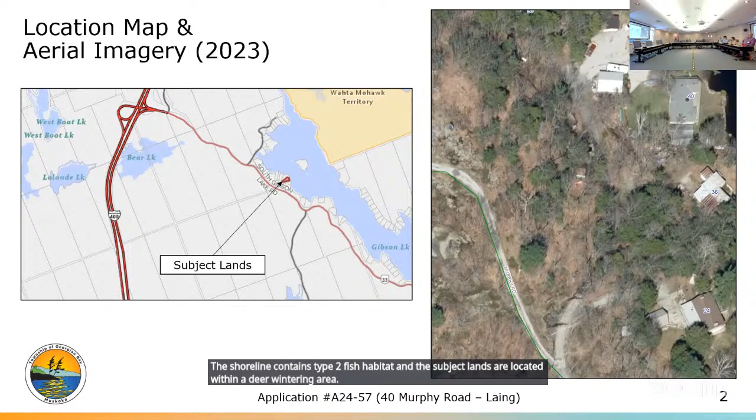Through the chair, the subject property has an area of 2,792 square meters or 0.69 acres and a frontage of 30.35 meters on Gibson Lake. A legal non-complying detached dwelling and shed occupy the lands. A shared driveway from Murphy Road runs through the middle of the property. The lands are designated waterfront within the district and township official plans, with high to very high archaeological potential and a moderate wildfire hazard rating. The shoreline contains type 2 fish habitat and the subject lands are located within a deer wintering area. The property is zoned shoreline residential type 1.

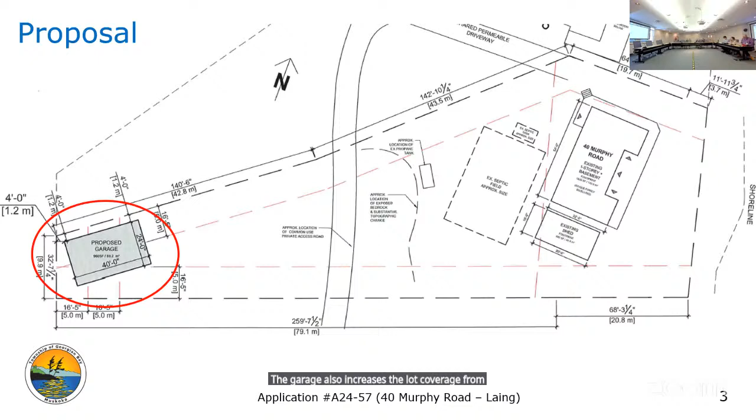The purpose and effect of the application is to seek relief from the zoning bylaw to facilitate the construction of a detached garage in the rear yard. The zoning bylaw states that accessory buildings located on lots zoned shoreline residential should not be located closer than 5 meters to a side lot line, whereas the applicant is proposing a minimum setback of 1.2 meters and 1.5 meters. Across all residential zones, an accessory building located in a rear yard shall not be located closer than 4 meters to the rear lot line, whereas the applicant is proposing a minimum setback of 1.2 meters. The garage also increases the lot coverage from 9.65%, or 259.6 square meters, to 12.49%, or 348.8 square meters, whereas a maximum lot coverage of 7%, or 195.4 square meters, is permitted.

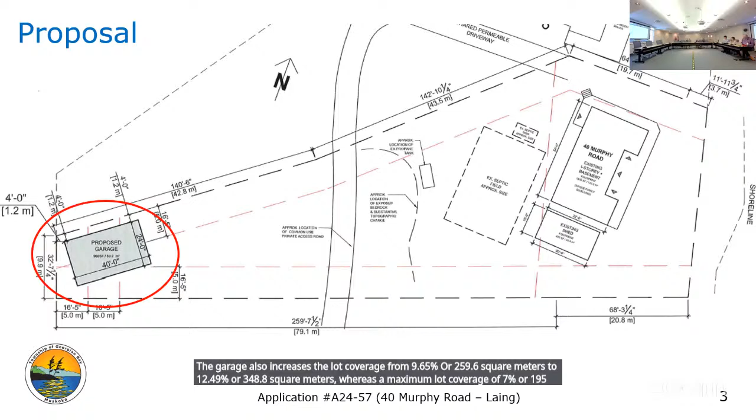The proposed garage will be 1 story with a height of 4.5 meters and a floor area of 89.2 square meters. To confirm, the garage complies with the maximum permitted floor area and height. The garage will be on relatively flat lands located at the top of a hill.

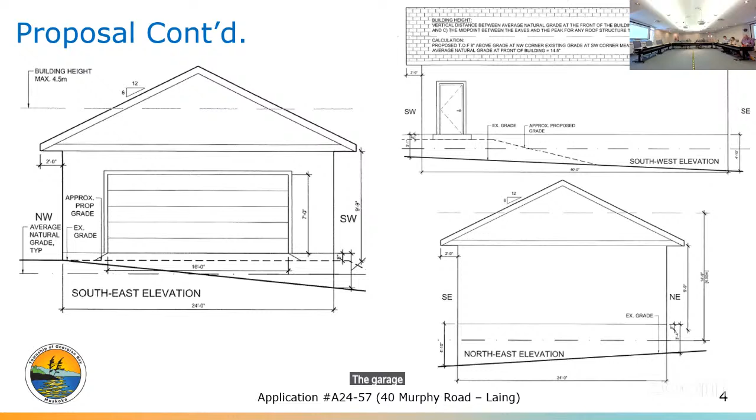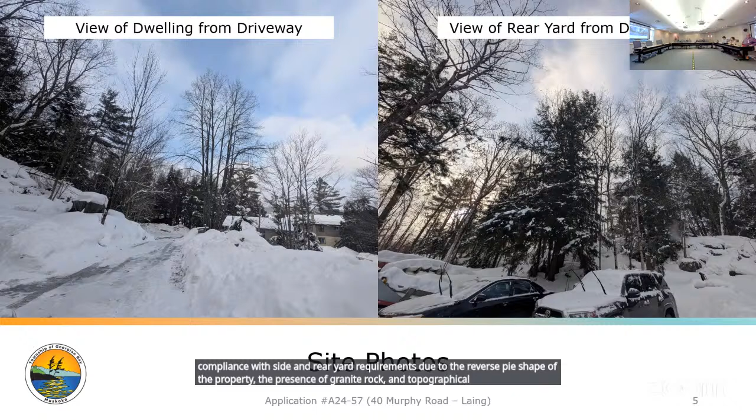The appearance of the property from Gibson Lake will not change with the addition of the detached garage, considering its location in the rear yard and the presence of dense mature vegetation. The applicant is unable to achieve compliance with side and rear yard requirements due to the reversed pie shape of the property, the presence of granite rock, and topographical constraints. Privacy will not be a concern for neighboring property owners, as the building is limited to 1 story with no windows, and there are no habitable buildings in the vicinity. The topography of the land indicates stormwater runoff will run down towards the center of the property.

The committee can either approve or deny any one of the requested variances, or defer the application to a later date if additional information is required. Planning staff have completed a detailed analysis outlined in the associated report and are recommending approval subject to conditions.

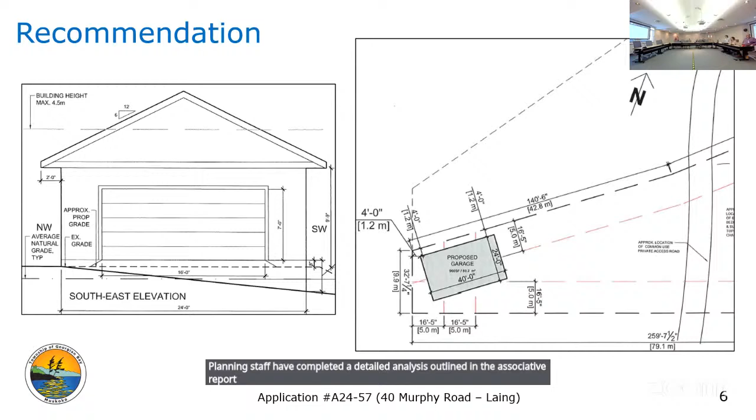Madam Secretary, has there been correspondence on this application? One letter was received from Kelly Nicholson, Chief Building Official, stating that there is no record of an existing system, and that there is no living accommodation or plumbing allowed in the garage.

If the applicant is present or online and wishes to address the committee, please step forward. Are you the applicant? Yes. In case there are some questions, we can put them to you and see where we go from there.

Is there any member of the public present who wishes to address this application? Seeing none present or online, I will close the public portion of the meeting and bring the application before the committee for any questions or comments. We will begin with Member Matthew.

Thank you, Mr. Chair. Shania, just curious on the lot coverage. It says that it's permitted to a maximum of 7%. Is that where it sits now, or is it over that? I'm having a tough time believing that a relatively small garage is pumping it up so much from lot coverage.

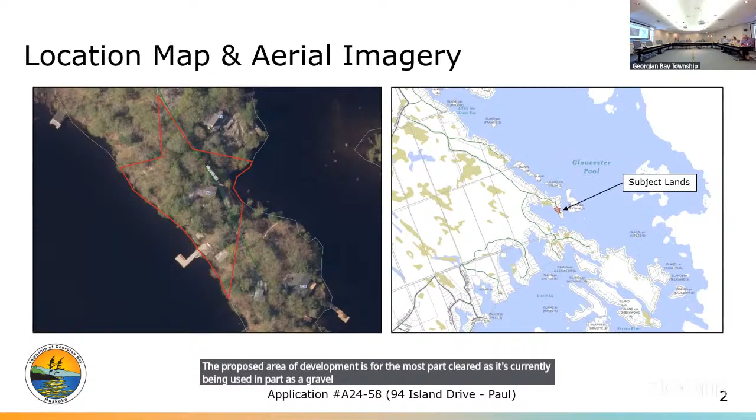In order to develop the property with the detached garage as proposed, a variance is required to address section 4.1.7 of the zoning bylaw. Section 4.1.7 speaks to the minimum yard requirements for accessory buildings. For shoreline residential or shoreline residential island zone lots, the minimum interior side yard requirement for any accessory building is 5 meters. Minimum interior yard setback provisions are intended to create adequate separation distance between neighboring residential properties and to provide efficient space for yard and building maintenance.

For non-shoreline residential properties, the minimum separation distance and interior side yard setback for accessory buildings is 2 meters. The minimum separation distance and interior side yard setback requirement increases to 5 meters for shoreline residential properties. The purpose of this increase is to reduce waterfront building and structure clustering, allowing for natural form to remain the predominant feature for shoreline areas.

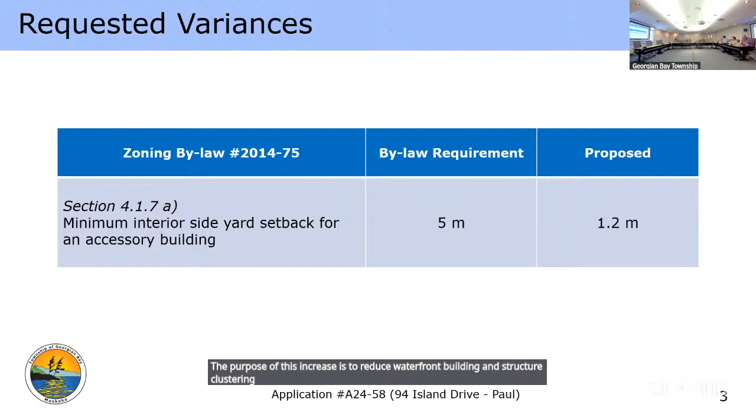The shape of the subject property is unique, presenting challenges to site a detached garage given the shared private road, the existing buildings and structures on the property, and the 2 shoreline frontages. The proposed location of the detached garage is the only portion of the property that would offer adequate setbacks to the private roadway, septic system, existing dwelling and accessory uses, and both shorelines.

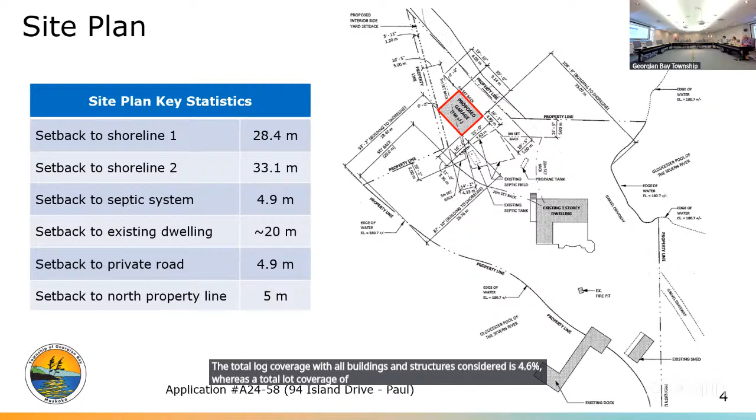The total lot coverage with all buildings and structures considered is 4.6%, whereas a total lot coverage of 8% is permitted. The proposed detached garage will be well within the maximum size requirements, being 70 square meters in ground floor area, whereas a maximum ground floor area of 112 square meters is permitted, and 3.6 meters in height, whereas a maximum height of 4.5 meters is permitted.

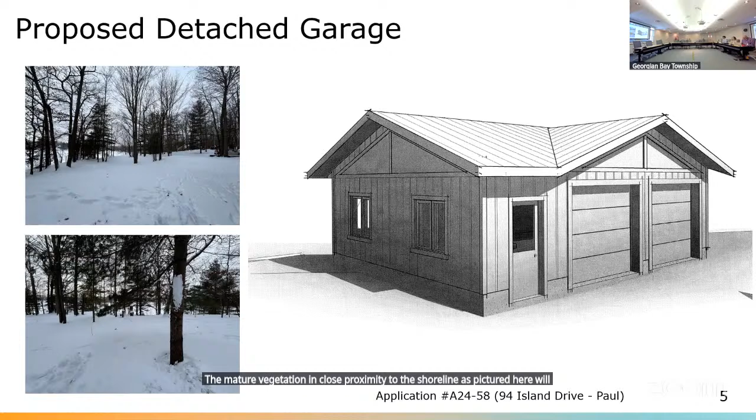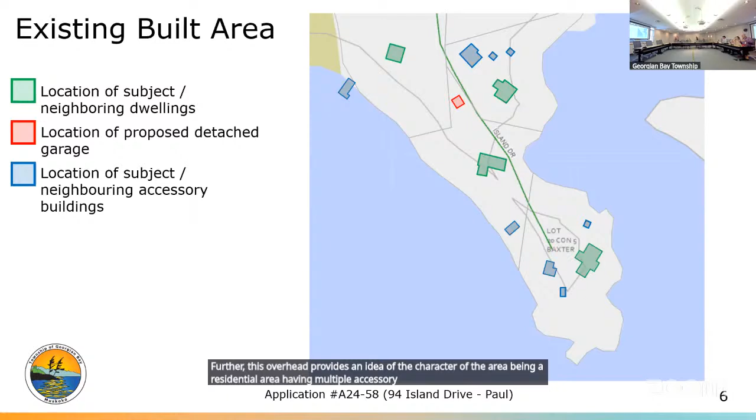The committee can either approve or deny the variance being requested. The committee may also defer the application to a later date if additional information is required to come to a decision. Planning staff have completed a detailed analysis of the variance of the zoning bylaw and are recommending approval subject to the conditions.

Thank you. Madam Secretary, has there been any correspondence on this application? One letter was received from Kelly Nicholson, chief building official, stating there could be possible issues with minimum required setbacks from the garage to septic depending on height of septic system above natural existing grade. Setback could be between 5 to 8 meters. And one letter of support was received from Lillian and Ralph Hutchinson.

Okay, thank you. Is the applicant or their agent present, and do they wish to address this application? Yes, my name is Greg Paul. Thank you. I think Andrew has actually expressed pretty much everything about this. There really is no other place for us to put the garage. Our intent, my wife's and mine, is to make this our permanent residence in the next few years. And we're tired of our cars getting dinged by falling branches. Okay, all right, if you don't mind just remaining there in case there are any questions that come your way.

Is there any member of the public that wishes to address this application? Okay, and do we have someone online that wishes to address the committee?

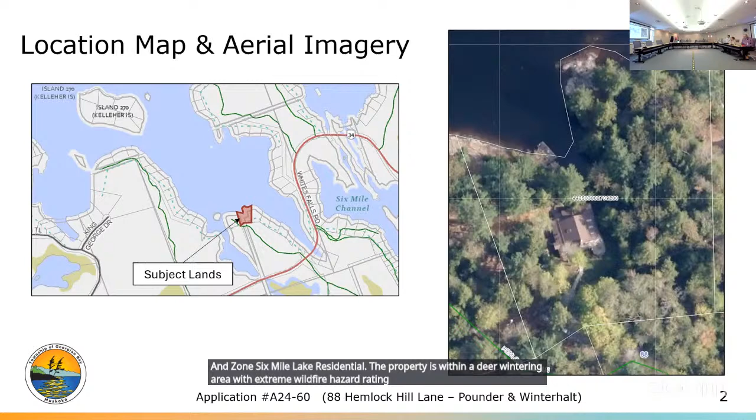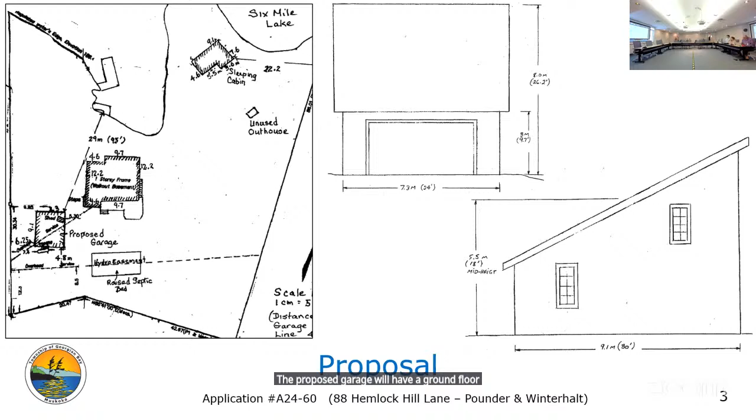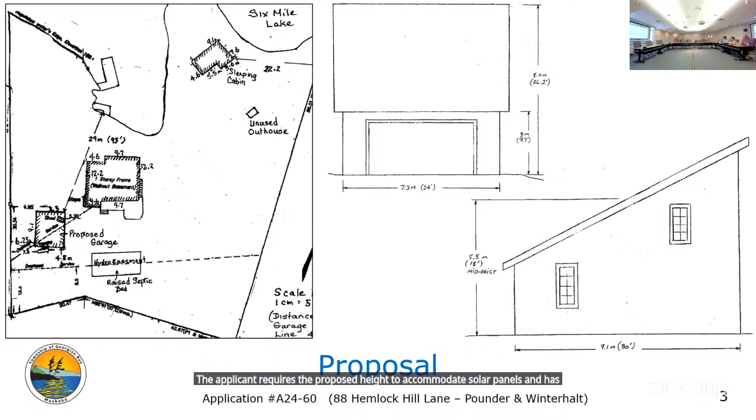The property is within a deer wintering area with extreme wildfire hazard rating, and the shoreline contains type 2 fish habitat. The purpose and effect of the application is to seek relief from the zoning bylaw to facilitate the construction of a detached garage with a height of 5.5 meters, whereas 4.5 meters is permitted. The proposed garage will have a ground floor area of 66.8 square meters and will be 1.5 stories. The garage will be located in the rear yard and requires the removal of a shed. The applicant requires the proposed height to accommodate solar panels and has informed staff that a height of 4.5 meters would require a roof slope that is too low to safely handle snow, putting the solar panels at risk of damage and reducing their efficiency during the winter season.

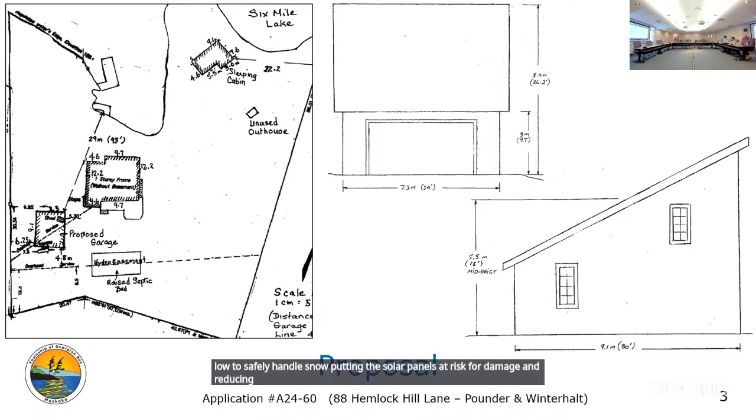Staff believe the proposed development will not have an impact on the natural heritage and aesthetic integrity of 6 Mile Lake, as there are no significant heritage features on or abutting the subject lands, and the garage will be located in the rear yard. In accordance with the principles of the community, the visual impact of development from the water is an important parameter in maintaining the character of the lake. As supported by photos provided by the applicant, staff believe the garage will not be visible from the water, and if so, will be screened by mature trees and the detached dwelling.

The intent of limiting the height of a detached garage is to assist with ensuring that the building remains accessory to the principal building or use on the lot in terms of size, and to reduce any potential negative visual impacts on both neighboring properties and the waterfront. The proposed garage height is less than that of the dwelling and has a smaller footprint. The detached garage will be screened from view by mature trees in the front, rear, and side yards, both on the subject and neighboring properties.

The applicant is also proposing increased side and rear yards of 6.25 meters and 14.4 meters, where a minimum side yard of 5 meters and a rear yard of 4 meters is required. Planning staff have completed a detailed analysis of the application as outlined in the associated report and are recommending approval subject to conditions.

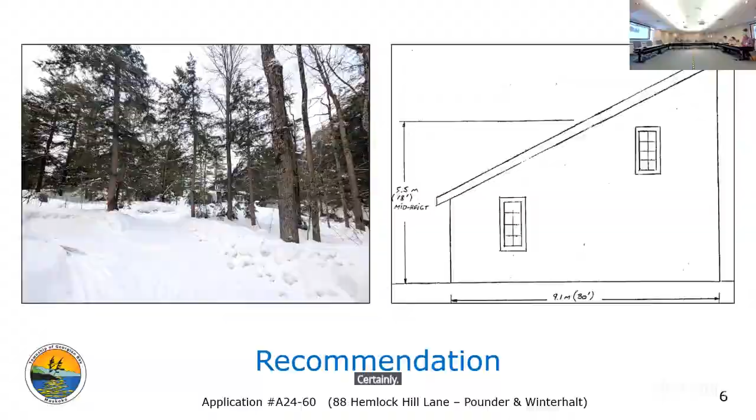Madam Secretary, has there been correspondence on this application? Certainly. One letter was received from Kelly Nicholson, Chief Building Official, stating that the garage cannot be beneath the service line to the house. Two letters of support were received from Liz Lawrence, Margot Parker, and Frank Longdice. Thank you.

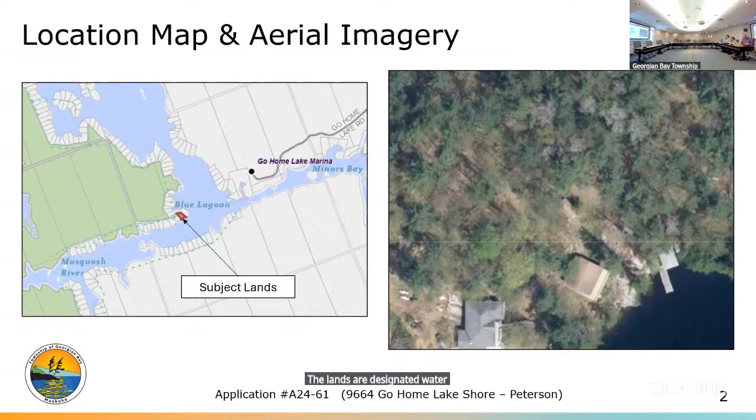In 2023, the Committee of Adjustment approved an addition onto the legal non-complying detached dwelling and an extension of the existing deck through minor variance application A23-28. The lands are designated waterfront within the district and township official plans and are zoned shoreline residential type 1.

The purpose and effect of the application is to seek relief from the zoning bylaw to facilitate the expansion of a legal non-complying deck and the construction of a new staircase. The proposed expansion is 12.82 square meters and will reduce the front yard from 6.78 meters to 6.46 meters.

For applications to expand a legal non-conforming use under subsection 45(2) of the Planning Act, the consideration is to be based upon both desirability for development of the property in question and the impact on the surrounding area. Only the proposed expansion may be evaluated for undue adverse impacts. The intent and purpose of the official plan is not a relevant consideration when applying these tests. In order to refuse the application, the undue adverse impacts of the proposed expansion must be demonstrated by objective evidence and must be sufficient to override the property owner's right to reasonable flexibility, evolution, and expansion.

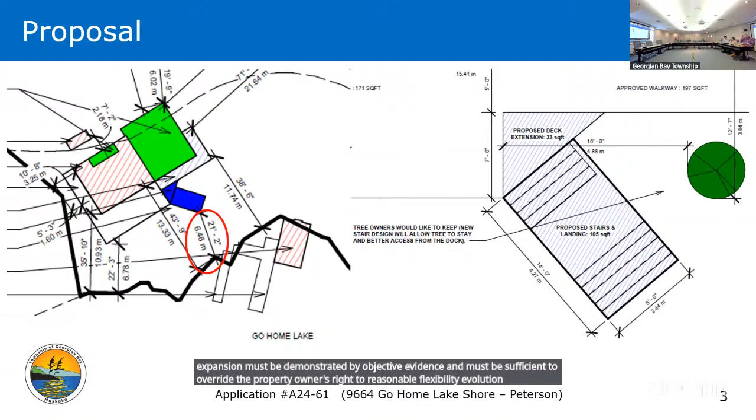A mature pine tree in the front yard is being retained as opposed to removed, which would otherwise be required to accommodate the longer than anticipated staircase from the deck that would maintain the legal non-compliant setback. To clarify, the previously approved staircase was located at the side of the deck running parallel to the shoreline.

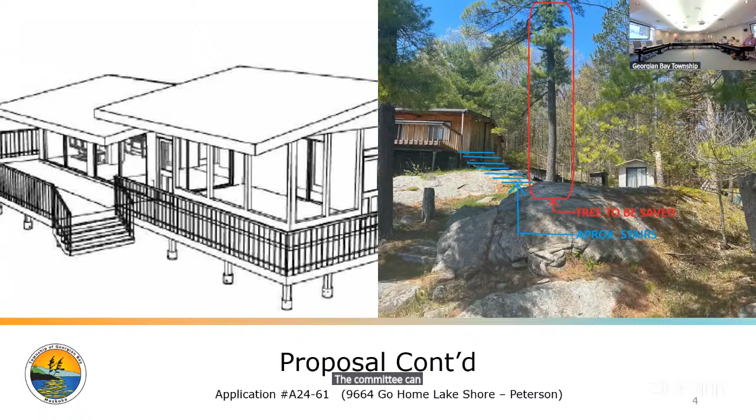The committee can defer the application to a later date if additional information is required to come to a decision. However, planning staff have completed an analysis of the application and are recommending approval subject to conditions.

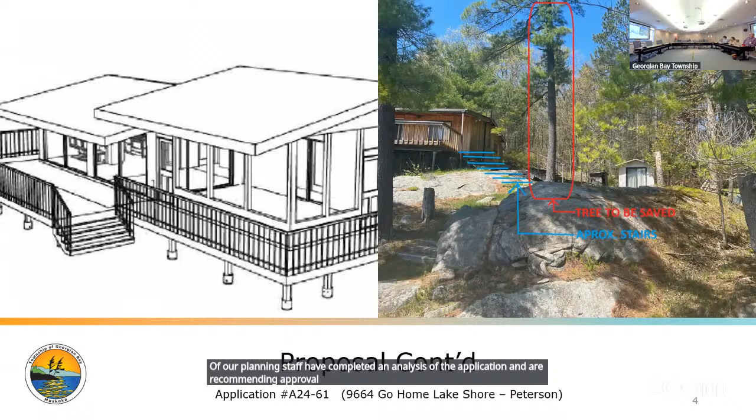Thank you, Ms. Swanford. Madam Secretary, has there been any correspondence in this application? Yes, one letter was received from Kelly Nicholson, Chief Building Official, stating she has no concerns.

Is the applicant present? If so, please step forward and identify yourself. Good morning, my name is Victoria Hoffman. I'm here on behalf of Flow Drawings at 3 Violet Drive, Port Severn. This one is pretty straightforward. As Shania said, we were here in August of 2023 for a cottage addition that was approved.

We expected the grade to come down a little bit, and once the floor started getting framed, they realized it wasn't going to work the way that they wanted to, in terms of the stairs. They're very attached to that tree in the front, and also, in one of those photos, there's a natural path that goes up between the rock ledges, and they just want to keep with that as opposed to trying to move the rocks around. Here to answer any questions.

Is there any member of the public that wishes to address the committee on this application? Seeing none, I'll close the public portion of the meeting and bring the application before the committee for any questions or comments. Seeing none, I will read the resolution.

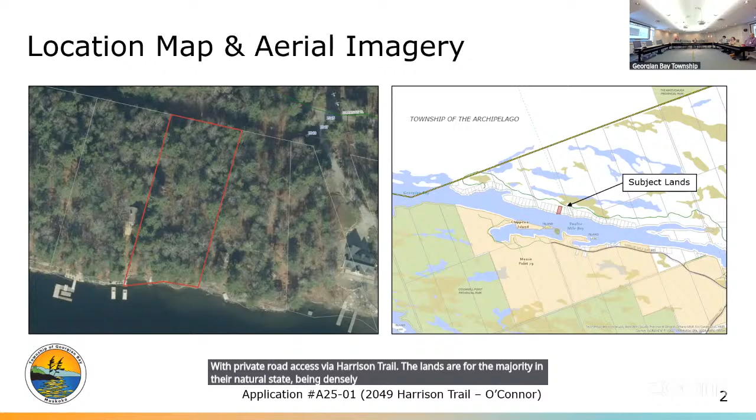Thank you, and through the chair. The subject property has an area of 1.15 acres with a frontage of 45.5 meters onto 12 Mile Bay, with private road access via Harrison Trail. The lands are for the majority in their natural state, being densely vegetated. The property currently contains a dwelling, a freestanding walkway, and a shore deck.

In accordance with section 4.11E3, the height of the legally existing dwelling shall be permitted to increase by 1.5 meters to a maximum of 6 meters based on the height of the legally existing dwelling on the day the bylaw was passed. However, the proposed increase is only 0.9 meters. The existing dwelling height is 6.27 meters, meaning the proposed height will exceed the 6 meter maximum, being a total of 7.17 meters.

The expansion is compliant with all other requirements of the zoning bylaw, being well within the additional legal non-complying dwelling expansion limits stated in section 4.11E3. The existing dwelling would be permitted to expand in gross floor area to 90.2 square meters. However, the development seeks to increase the size of the dwelling from the current 53.05 square meters to 66.89 square meters. The dwelling width is not proposed to increase at all.

The proposal will also see the existing open deck at the front of the dwelling wrapping around the east side of the dwelling, not further encroaching into the front yard setback. The proposed expansion remains well within the maximum lot coverage, increasing the lot coverage to 2.24%, whereas a maximum lot coverage of 7% is permitted.

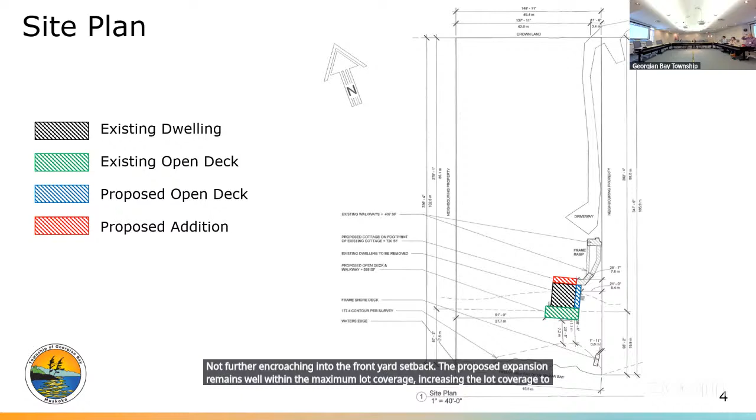The front facade of the dwelling will not be subject to any major alteration. The proposed development will not expand in width or encroach any further into the front yard setback. The aesthetic qualities of the building profile will remain, with the increase in height being the predominant physical change visible from the shoreline. The expansion in the location proposed will not alter the natural aesthetics of the property and will still be in character with the surrounding land uses.

Additionally, no visual or environmental impacts to neighboring properties are anticipated due to the location and size of the proposed development. The surrounding vegetation cover will be unaltered, shielding the expansion from the neighboring buildings and amenity areas.

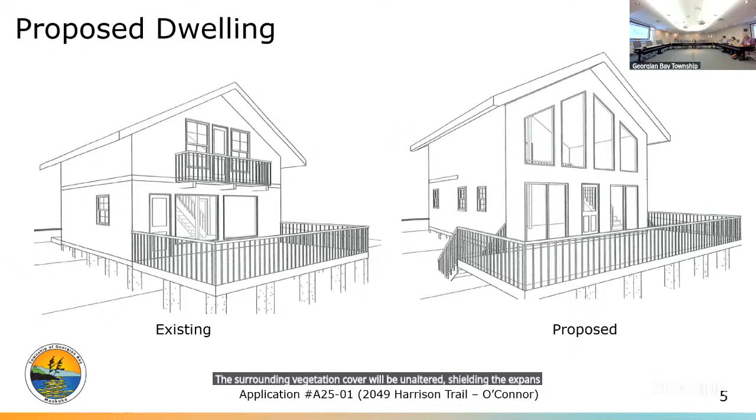The committee can either approve or deny the variance being requested. The committee may also defer the application to a later date if additional information is required to come to a decision. Planning staff have completed a detailed analysis of the variance to the zoning bylaw and are requesting approval subject to the conditions.

Thank you, Mr. Donaldson. Madam Secretary, has there been correspondence in this application? One letter was received from Kelly Nicholson, Chief Building Official, stating that no septic records will cause issues with obtaining the building permit. Is the owner's agent or owner present and wish to address the committee?

My name is Victoria. I'm here with Flo, 3 Violet Drive, Port Severn. The owner is also online, but I'm the agent for this application.

From a design perspective, we're just looking to rebuild on the same footprint and then go back a little bit further. We were limited in ways because there's quite a rock drop behind the cottage. When we started looking at the height, the existing walls are only 5 feet on the sides, I think 4'10". With our stair placement, we wanted 6'8" going up to the top, just to make sure that when you get to the top of the stairs, you're not hitting your head. Essentially all we're asking for is the height of a doorway at the top of the stairs, and then working with the sloped ceilings from there.

There will be a new septic application coming in once this gets approved. But yeah, here to answer any questions. Okay, thank you.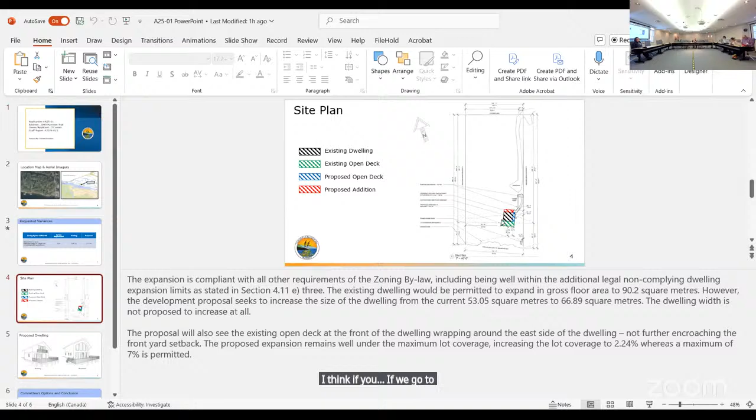Okay, thank you. I think if we go to the survey - so the black box is the existing, and the red is where we're expanding. There's actually currently a walkway there right now, so we're just using that existing walkway. It's just under 24 feet, and we're going up to 30 feet deep, pushing it out the back.

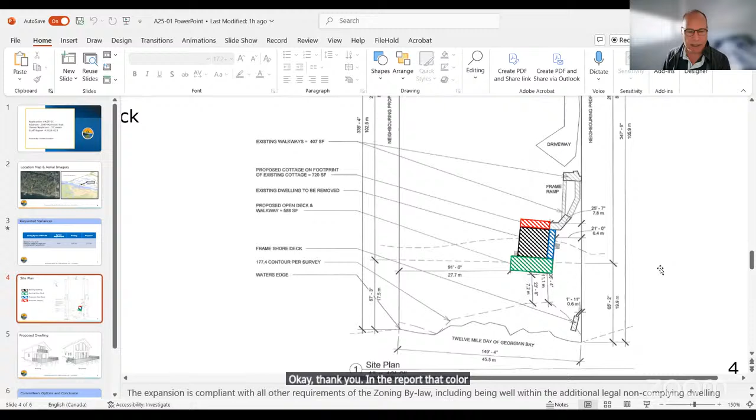Okay, thank you. In the report that color difference wasn't as pronounced as in the presentation. Thank you.

Are there any further questions or comments from the committee? Seeing none, I will read the resolution.

It is moved by Member Matthews and seconded by Member Predko. Be it resolved that the Township of Georgian Bay Committee of Adjustment approves minor variance application A25-01 to zoning bylaw 2014-75 as amended for 2049 Harrison Trail, to facilitate the expansion of a legal non-compliant dwelling as described below. Number one is an increase in maximum height to 7.17 meters, whereas section 4.1E2 permits a maximum height of 6 meters.

The above noted approvals are subject to the following conditions. One, that the owner provide a property tax certificate or correspondence from the Township Financial Services indicating that all property taxes have been paid up to date with respect to the property subject to this decision. Two, that the proposed dwelling is substantially and proportionately in conformity with the dimensions as set out on the application and sketches submitted and approved by the committee. And three, that the appropriate zoning certificate and building permit be obtained within 3 years from the date of decision from the township, only after the committee's decision becomes final and binding.

All those in favor, please signify by raising your hand. Thank you. The motion is carried and the application is approved.

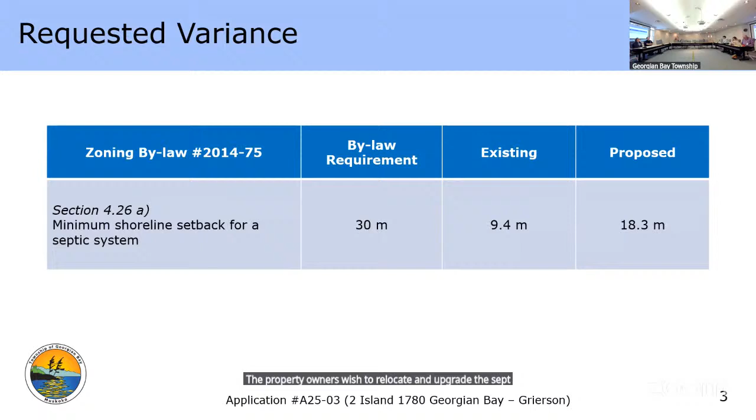The property owners wish to relocate and upgrade the septic system as a courtesy for necessary improvement to protect the water quality of Georgian Bay.

As shown on the site plan, the proposed septic system will be appropriately set back from the cottage and all accessory buildings. The justification behind the relocation of the septic system is the inability to adequately set back the septic field due to lot depth and lot area constraints. The area of the proposed septic field is at the widest portion of the island property, offering the maximum setbacks to each side of the island.

Section F.5.10.8.12b of the Township Official Plan states that new individual on-site sewage service systems are encouraged to be located as far back as possible from the shoreline and shall be located a minimum of 30 meters from the high water mark, unless it is not physically possible due to terrain features or lot depth to locate the service system at such a distance, and should be located in an area that affords vegetated cover within the setback area.

Further to this, Part C of the section states that wherever possible, property owners of existing individual on-site sewage service systems are encouraged to upgrade the existing system to current standards. In this case, the system cannot meet the 30 meter required setback due to insufficient lot depth. The upgraded system will be placed in accordance with current standards and located in an area affording vegetative cover and surrounding shoreline.

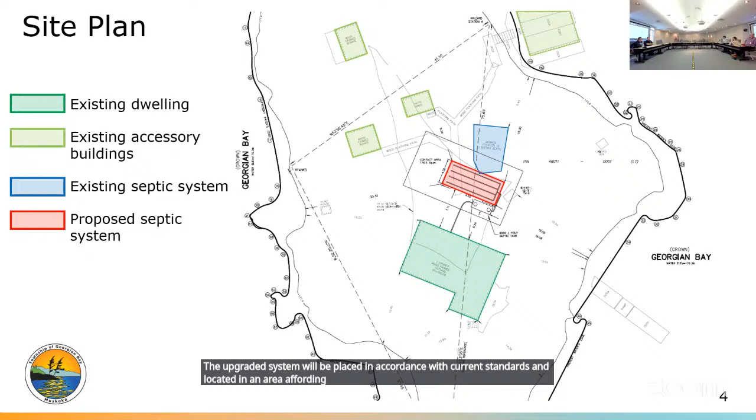The septic system will be sited on a portion of the island that is for the majority clear of vegetation. The extents of the system are displayed by the stakes highlighted in red. It is estimated that a maximum of 4 mature trees will be required to be removed for the construction of the system as proposed.

Section C2.6.4.2e of the official plan states that a minimum 30-meter setback from any shoreline shall be required for leaching beds. Where this is not feasible, the system shall incorporate soils that have demonstrated ability to effectively retain phosphorus, or equivalent phosphorus abatement technologies and on-site phosphorus management and impact mitigation measures in accordance with the standard protection policies of the district plan will be required.

The determination of materials used to facilitate the relocation and replacement of septic systems is regulated under the Ontario Building Code. The proposed septic system expansion will be completed by a qualified septic installer under current regulations of Part 8 of the Ontario Building Code, with regard to sensitivity of land use within waterfront designations.

The committee can either approve or deny the variance being requested. The committee may also defer the application to a later date if more information is required to come to a decision. The variance before the committee today is only the consideration of the setback to the shoreline. Planning staff have completed a detailed analysis of the variance to the zoning bylaw and are requesting approval subject to the conditions. Thank you.

Madam Secretary, has there been correspondence on this application? Yes. One letter was received from Kaylee Nicholson, Chief Building Official, stating the proposal increases the existing setback as well as updates with the septic system. The proposal will be required to meet the Ontario Building Code.

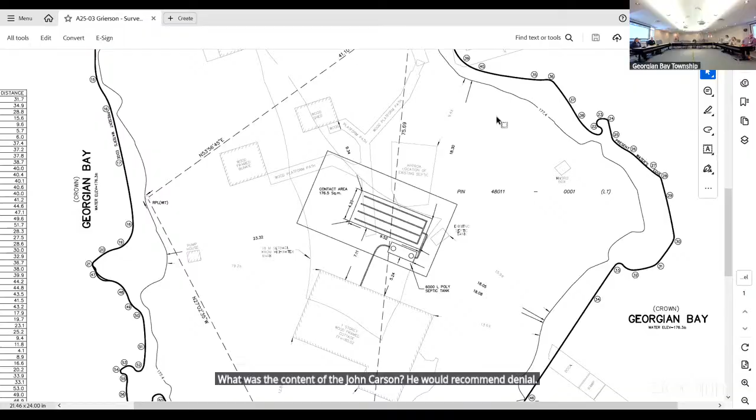So what was the content of the John Carson letter? He would recommend denial. For any given reason? Because it doesn't meet the Ontario Building Code. It's not 30 meters back, I believe, and it's only 18 meters. Right? So again, we're talking about the matter before the committee, which is location. Location, and the moving of it.

Yeah, and just so we're all clear on this, I'm going to go back to our chief building official. There's a question here about whether it is appropriate to relocate the septic system on that island. We've got the situation where the zoning bylaw requires a setback which can't be met because the island's not big enough. So an alternate location, that is an increase in the setback from the shore, is that acceptable to the building department? And I guess it would have to be the planning department as well.

Correct, because the building code does have setbacks, but they are lesser than what is required in our zoning bylaw. Our zoning bylaw is applicable law. That is why we're here before you. If that 30 meters wasn't in here, we wouldn't be here.

And the actual setback in the building code is to the water. So the other good thing about the zoning bylaw, as we were talking before, especially on Georgian Bay, is it has that set elevation, because we all know Georgian Bay goes up and down. So the building code is to the water. We've had for years the 177.4, which gives us an elevation to set it back from. So even on top of that, it's set back further. So we're well above the 177.4? 18.3 meters, I think, is what it says on that.